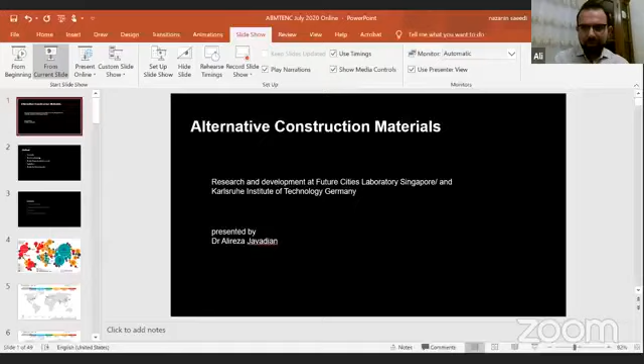Great, again very good afternoon to everyone. My name is Alireza, and I'm doing my research at the Future Cities Lab in Singapore, which was set up by ETH Zurich in 2012 to do research between Zurich and Singapore with the invitation of Singapore National Research Foundation. I'm also working with Karlsruhe Institute of Technology in Germany, which is also my next move to continue my research. A very quick outlook of today's presentation: I'll start with a short introduction, a quick research methodology of my research mainly on bamboo composite materials, some applications we have worked on over the past couple of years, and finally a quick heads up on our future cooperation, hopefully with your very good team back in Brazil.

So the reason we started this research in 2012 was the fact that we were looking into urbanization. And when we started to do a little bit of research on how the world urbanization and urbanized population looks like, we ended up having this map.

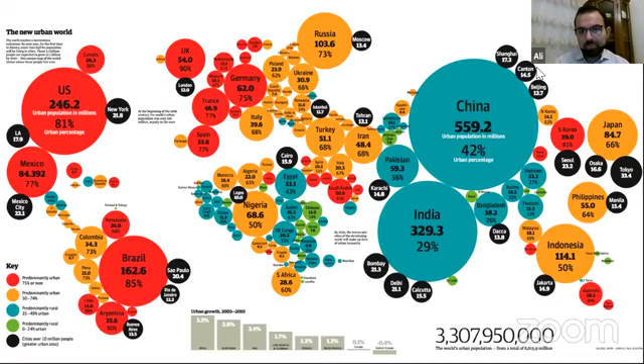As you can see, this map was generated between 2005 and 2010. You can see countries in Asia, Southeast Asia, like Indonesia and the Philippines, where more than 50-60% of the people are living in urbanized areas. If you look into Latin and Central America, where Brazil is located, this counts up to 85%. What does this number mean to us as architects and engineers? It means that we need to look into how we can provide basic infrastructure for the people who are moving into urbanized areas.

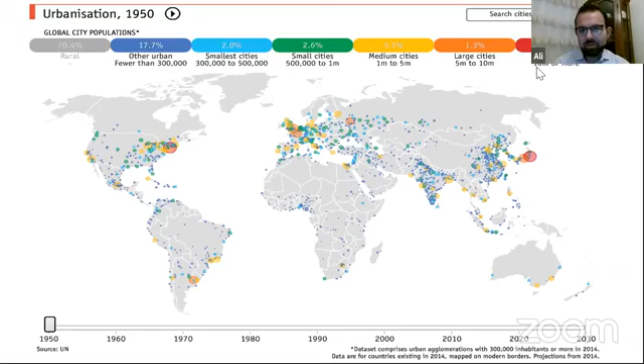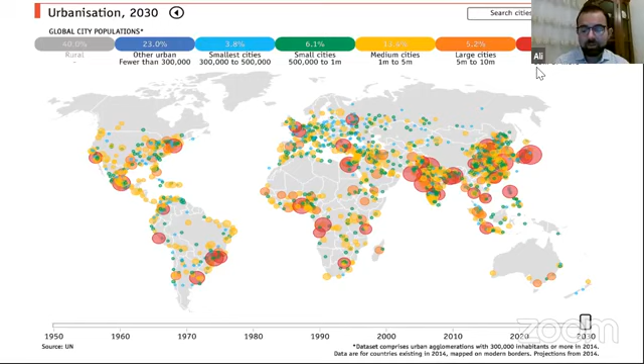In 2030, the estimation is that more than 13% of the people living in medium cities, and that creates a big challenge for government agencies, administrators, industries, and the building and construction industry, because we need to provide these people with housing solutions.

So this was our main challenge. When we started our research, after almost 6 months, we started to find the problem. By 2100, globally, we would need more than 2 billion new housing units.

At the same time, we are working with finite material resources. This demand is more acute in developing countries like in Southeast Asia, like Indonesia, like Malaysia, or in Central Latin America, like Peru, like Ecuador, like Colombia, and in Africa, like Ethiopia, like Kenya.

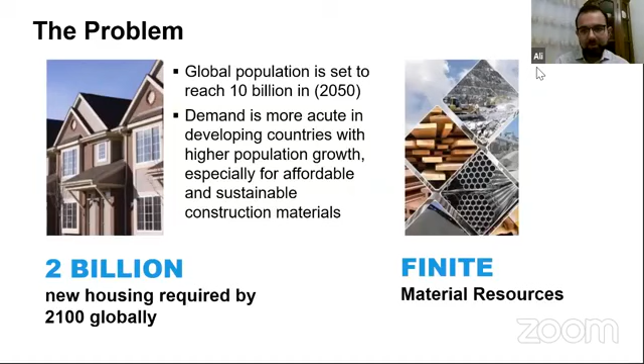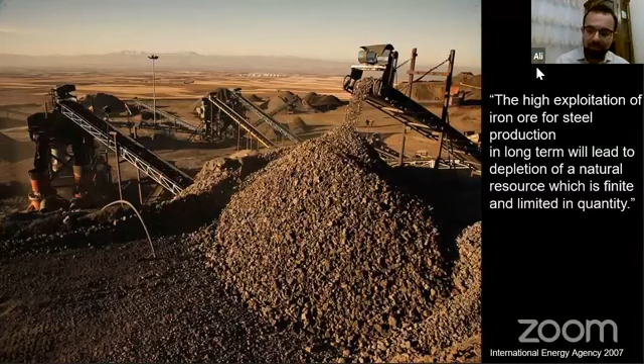If you look at the materials that we as civil engineers, or even as architects, are traditionally using, it's steel. Unfortunately, steel has a big challenge for us because iron ore is not going to be renewed over the next couple of years, but over the millennia. So we have limited resources of iron ore.

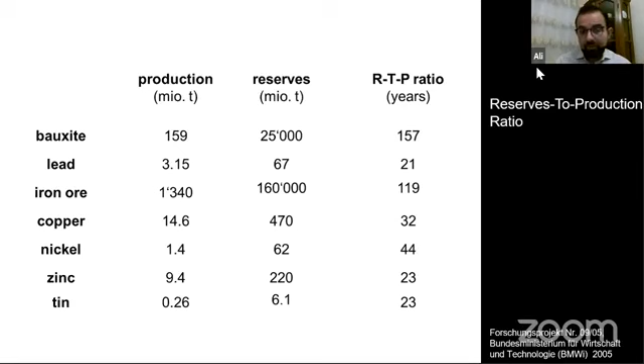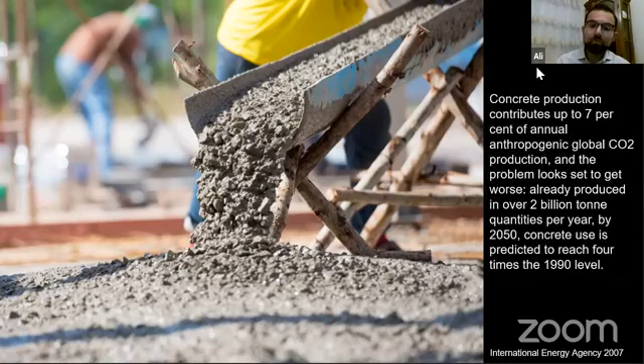Same for concrete. Even though it's a very cheap material, it may not be very sustainable because almost 7% of global CO2 emissions are contributed by the cement industry worldwide. This means that in terms of environmental factors, concrete or even steel might not be the right solutions.

So we started to ask ourselves, what would be an alternative? But before I jump to that, I would like to talk about our hypothesis. Normally I don't show the hypothesis of our research, but here, since I'm talking to experts in the field, this was very challenging for us because we were not sure which direction to go. It took us almost 2 to 3 months to formulate the hypothesis.

So finally, we formulated that it is possible to develop high-performance composite materials from alternative and renewable resources that can be designed to have the necessary properties and be applied in the building and construction industry. Our main focus was to use alternative and renewable resources for the building and construction industry, from technologies already in the market: composite materials.

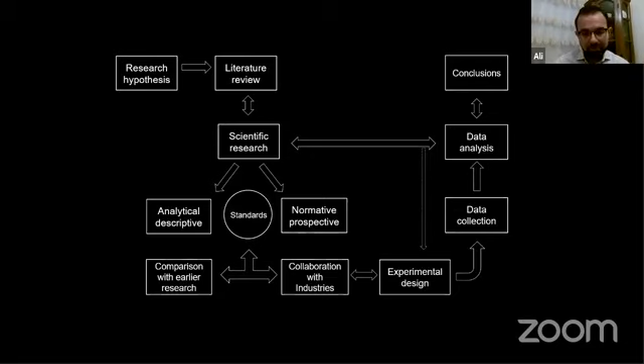So we set up our research lab in Singapore in 2013, after almost 1 year of preliminary research and understanding of what we wanted to do. The grant we received was from the Singapore National Research Foundation, 80%, and 20% from the Swiss National Research Foundation.

We called it the Advanced Fiber Composite Laboratory because we weren't yet sure we were going to use bamboo fiber, so we called it Advanced Fiber. We wanted to ensure it remains very general, so if we change the fibers, we still have the same lab. This was the basic setup of the lab in 2013, which of course now looks very, very different.

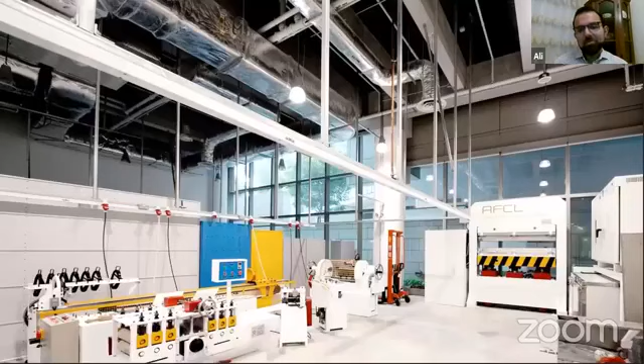We started with machineries that already existed in countries like China and Indonesia for the wood factories, and even for the bamboo industries, because the bamboo industries back in 2012, 2013 were not so interesting for even the Chinese. So we started to modify and design some of these machines ourselves, but we made most of them in China, in the factories we were collaborating with, as well as in Germany. But in terms of pricing, at the end we started to look more into China and Taiwan.

But if you go to Southeast Asia, to Indonesia, to Thailand, you see bamboo plants. I'm sure, as you see in Brazil, along the roads, in normal villages, in small towns, you see a lot of bamboo. But in Singapore, unfortunately, you don't see it. And when we started to talk about bamboo in Singapore, they looked at it as a poor man's timber. This was, of course, very hard for us because we wanted to promote using bamboo.

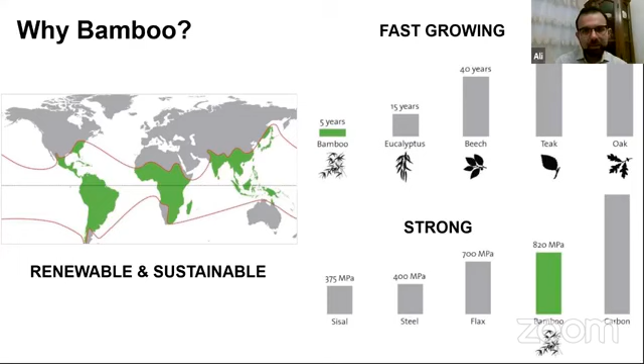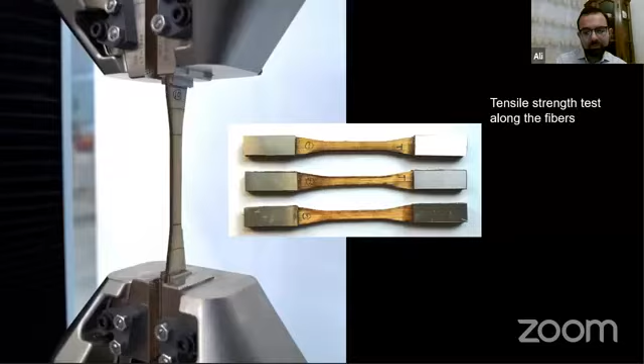So we started to collect bamboo from this region, from Thailand, Indonesia, Malaysia, around 13 countries. We traveled to them, looked at the bamboo plants there, and tested them from different ages. At the end, we tested many mechanical properties in terms of tensile properties, bending capacities, and flexural strengths. But one of our main team challenges was the lack of standardization.

ISO has a very, I would say, outdated standard for testing materials like bamboo. Unfortunately, many of those standards we started to follow caused problems, because when we changed the bamboo species, either the bamboo column was very thin or the bamboo wall thickness was very thin, and we were not able to follow the standards. That made our testing a little bit tedious and time consuming. It took us almost 1.5 years to test most common bamboo species from this region.

What was interesting for us was that the most common bamboo species in Southeast Asia was Dendrocalamus asper, and this is some of the classification we did. We classified these bamboos according to their wall thickness as well as according to the culm diameter. The maximum strength in terms of tension we found was 340 MPa, and the lowest was 193 MPa. There is a wide range of mechanical properties between the bamboos we collected. Even the same species grown in Southeast Asia, but in different regions, had different mechanical properties.

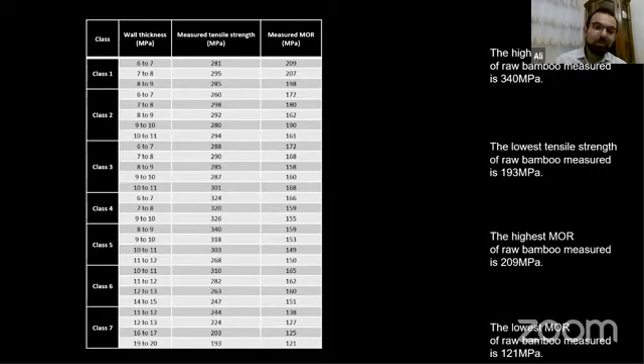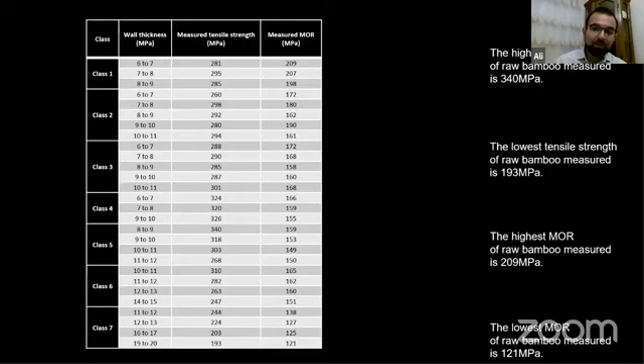This shows another challenge for us where we wanted to promote bamboo, because the industry and even government agencies like the building and construction industry in Singapore see this as one of the main challenges: how we can standardize bamboo for use as a building material. But we did some statistical and mathematical modeling to see how we can estimate the mechanical properties without testing them.

This was very important for us, because when we wanted to order some bamboo, for example, from Indonesia, we didn't have to travel all the way, or necessarily ask them to send us a few samples. So based on more than 5,000 samples, we developed basic formulations to estimate mechanical properties like elastic modulus, modulus of rupture, compressive strength, and tensile strength. We had a good estimate before we received the bamboo, so we could tell farmers not to cut a certain bamboo, and instead cut it to the specification we wanted.

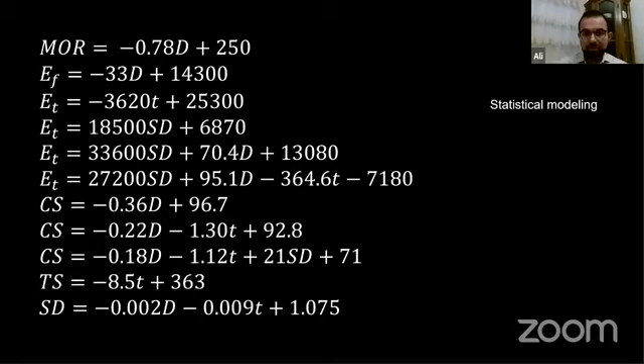The next step was how we wanted to industrialize bamboo. As you know, bamboo in its raw, natural form has been used for many centuries around the globe, which was very interesting for us. Much of our knowledge came from papers Professor Ghavami wrote about the use of bamboo in Brazil and other countries he worked in over the years. But we wanted to see how we could promote bamboo as a fiber in high-tech technology.

So we started looking into composite fabrication, basically fiber reinforced polymers, but using bamboo fibers. Our main challenge was that if we used any adhesive system, we had the challenge of sustainability, since we wanted to promote bamboo as a sustainable material. At the same time, if we used a non-sustainable synthetic adhesive system, we had the challenge of convincing the industry to call our product green. So we had 3 criteria to choose our resin system: VOC free, acceptable mechanical properties, and bio-based content.

So we worked with 2 polymer companies, some of you may have heard of them: Rehau from Germany, and Wacker, also from Germany. It took them almost 2 years, a very progressive process, to reach a stage where we had a resin system comparable to something like Araldite, with the mechanical properties we wanted and high bio-based content that made recycling possible.

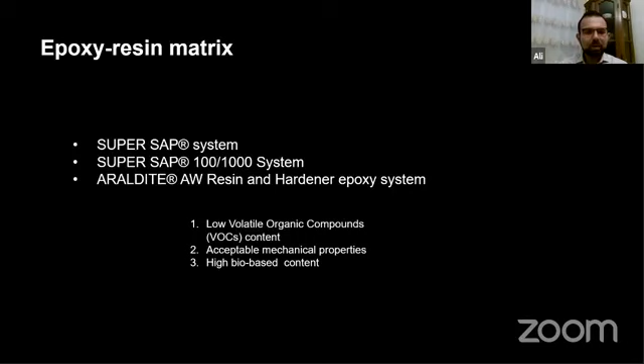The next step was to process the bamboo into strands. We used machinery that was already being used in many countries around the globe, but we made modifications so we could get these strands into the right shape, the right thickness, and with the right fiber diameters.

The next step was how to get the bamboo fiber to interact with the resin matrix. Finally, we used a hot press compression molding system to compress all these impregnated layers together. The combination of hot press temperature, pressure, and time was very important. These 3 stages took us almost 2.5 years to reach the final product with the properties we wanted.

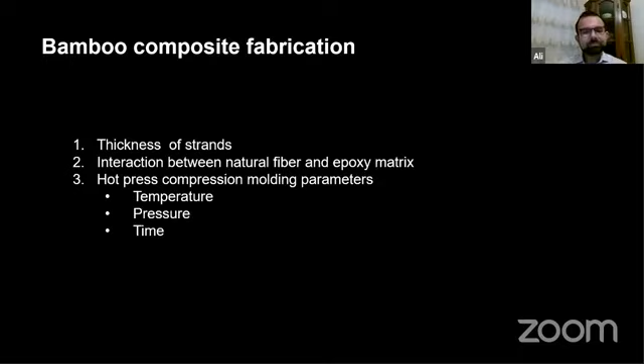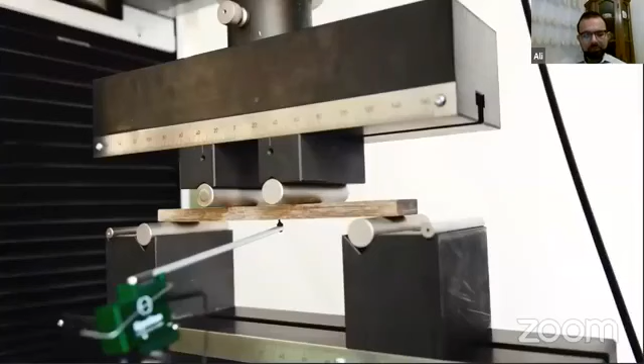Again, we regularly had to do testing of mechanical properties like tensile strength and elastic modulus, both along the fibers and across the fibers, as well as bending along and across the fibers. From late 2013, when the lab was fully set up, until late 2017, when we were confident this was the product we wanted, we tested more than 10,000 samples for bending and more than 8,000 for tensile, using a variety of bamboo species we had in Indonesia.

So I'd like to pause a little bit here, because there are many numbers to digest.

These are the properties we achieved at the end of 2017, based on the tests I mentioned earlier. As you can see, in terms of tensile strength, we had a range of between 200 to 300 MPa, that's Newtons per square millimeter. When you compare it with glulam, this is the glulam widely available in Singapore.

They've recently used it for non-structural walls in Singapore, but it's also imported mostly from New Zealand, Australia, and Germany. In terms of bending strength, flexural strength, it has high bending capacity—almost 10 times that of glulam.

In terms of compressive strength, the range is wider, again depending on the fiber, the density of the natural bamboo material, and where we collect or harvest the bamboo.

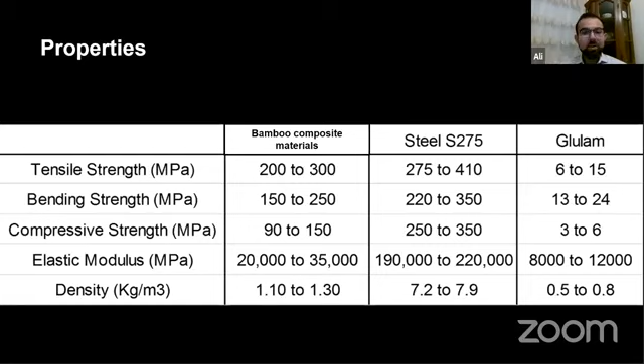But this is very important, because normally we should compare the strength to weight ratio. When you compare the tensile strength to density—the ratio—between the bamboo composite and glulam, the bamboo composite stands much, much higher.

I'd like to move on to the next step, which is the applications. The very first application, and the title of my PhD thesis back at ETH Zurich, was how we can replace steel in concrete with our material.

I'm very happy that Professor Ghavami is here tonight, because most of my work and the literature review I did, I learned from him. His work over the past 20-30 years was very promising and gave me the momentum to believe it's possible—if natural materials can be used in concrete, then why not a bamboo composite?

So we did a lot of pull-out tests to see the bonding mechanism between concrete and bamboo composite materials, because normally steel has very good bonding between the two materials, but we wanted to ensure this material also has good bonding.

What we did was apply some type of coatings that we got from two chemical companies I mentioned earlier, because chemistry was not my capacity or expertise. So I had to get that knowledge and expertise from Wacker and Rehau.

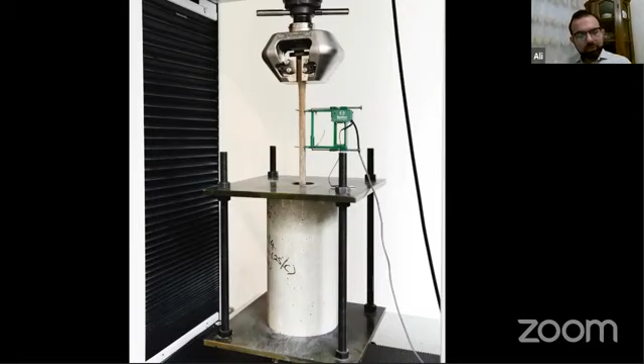This was the bamboo composite reinforcement system that we developed in Singapore. Even the stirrups, the shear reinforcement, were made from the bamboo composite materials we developed—the longitudinal reinforcement, the whole system.

The idea, early on, was that we could have a prefab system—basically this whole element that you see for reinforcing.

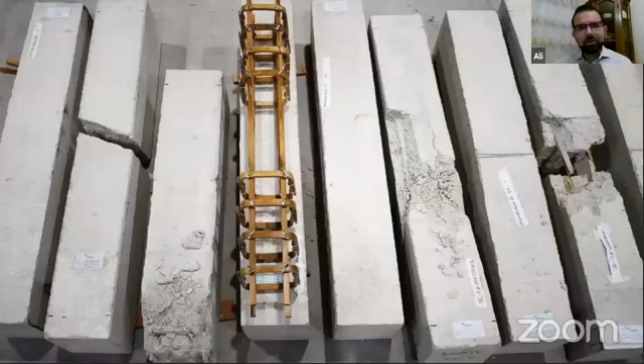Some of the testing we did followed ACI FRP standards for designing the beams. We wanted to see where shear failure happens, where tensile failure happens, and where compressive failure happens in concrete—but most importantly, we wanted to have the tensile failure occur in our bamboo composite reinforcement.

The results were quite promising. We published a paper on it, and even my thesis, available at the ETH library, explains all these calculations in much detail. The next application I worked on after defending my PhD thesis was how to reduce the cross section of glulam beams.

Because glulam, when used for buildings higher than one story, requires more layers, resulting in heavier elements and more material. So we wanted to promote sustainability and a higher strength-to-weight ratio.

So what we did was say: if you don't want to use the whole section out of glulam, you could use part of it out of glulam and then reinforce it with our materials.

Again, the results were quite promising—we achieved a 20 to 25% increase in mechanical capacity, especially in elastic modulus in terms of deflection. This was the idea on how we can promote our bamboo composite materials, especially in countries like Singapore that are a bit reluctant to use anything related to bamboo.

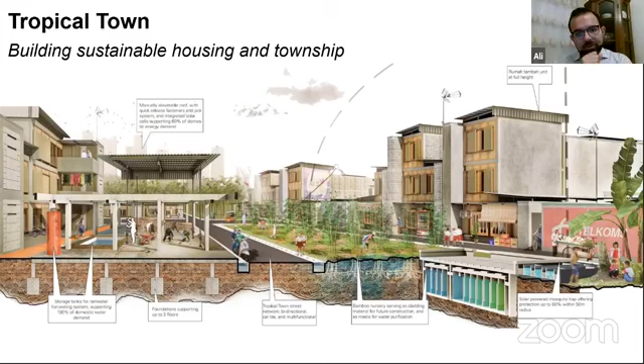So we started to look at how we could use our materials to build housing. You can see the models of the house here. One of the criteria they gave us was that they didn't want to see the whole thing made out of bamboo composite, because they saw this as a cultural shock.

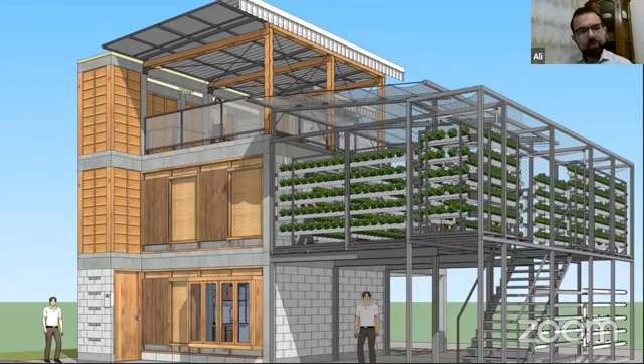So they wanted a combination of traditional materials like concrete and our materials. We accepted this because it was a very good opportunity to showcase that it's possible to use our material in a natural environment. It's quite strong, quite resistant to fungi and insects, and unlike natural bamboo, you don't have a lot of problems with insects or UV, or need to protect it. Therefore, we accepted that offer and built that house in Batam, Indonesia.

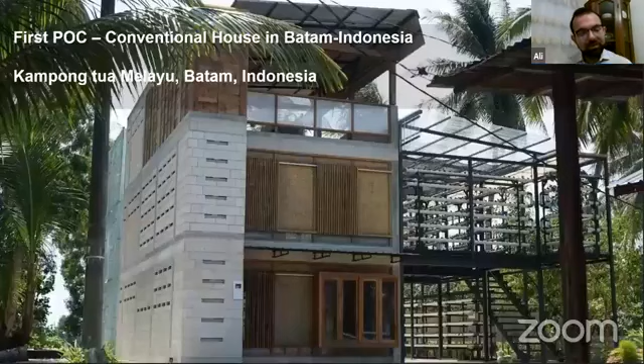In July last year, we officially launched the house. It was our very first proof of concept, and it was warmly received by the Indonesian ministries as well as our Swiss ambassador in Indonesia. It was, I would say, a small milestone for us after almost 7 years of research.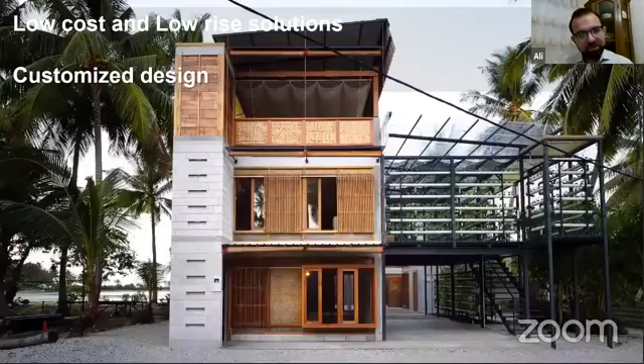On the first floor, we used our material as door frames, window frames, and shading frames. On the second floor, moving to the interior, we used our materials as a cladding system. On the third and final floor, we used the columns and beams again. So as you can see, gradually we moved to replace the conventional materials with our materials.

Instead of telling them we can use the whole material for the whole house right away, we said we could do it gradually, to showcase that it's possible to use our materials. On the second story, we had Hebel blocks, but on the third story, we replaced the Hebel blocks with only 10mm, or maybe 15mm, bamboo composite boards, along with the columns you can see around the boards.

So I would like to move on to the next step, and I would like to see what the panelists would like to discuss.

Late last year, we registered a spin-off called Widuz with the idea that we could commercialize our research and bring it to applications. ETH Zurich supported us at the earliest stage, giving us access to investors, venture capitalists, and industrial partners, to raise a bit of funding for promoting our startup. Currently, we are at the stage of raising funds to set up our very first factory in Cambodia, near Singapore.

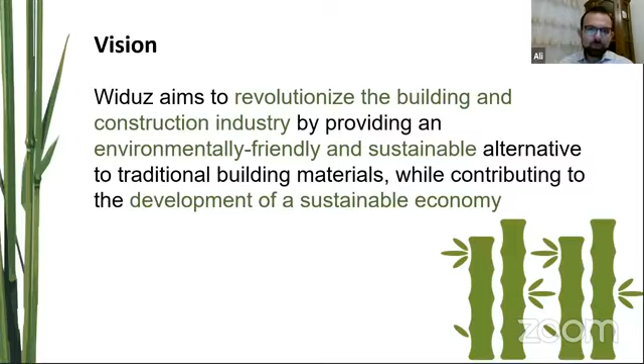Widuz currently collaborates with the Singapore ETH Centre, the branch of ETH Zurich in Singapore, and with Karlsruhe Institute of Technology back in Germany. Together we are trying to scale up the process we developed in Singapore and commercialize it. We also have industrial partners in the stage of discussion and negotiation that I cannot name here.

A very important part is how we can address the Sustainable Development Goals. Based on our research, we see that we can address at least 6 of these SDGs.

No poverty: when we create our factory in Cambodia, we can create new bamboo plantations, create new jobs, and employ locals who don't have jobs. This is very important for low-income countries like Cambodia and Vietnam, which need new ideas for job creation.

Clean energy: not the whole bamboo can be used for this process. Some of it could be used as biomass for producing electricity, especially in these countries that don't have access to electricity all over the country.

In terms of sustainable cities, bamboo can be used for affordable housing solutions.

Goal number 12: we can use a green, sustainable alternative like bamboo composite to replace steel, concrete, and glass, at least in regions with access to bamboo. And bamboo itself, as you might be aware, is a natural carbon sink—it absorbs a lot of CO2, even compared to timber.

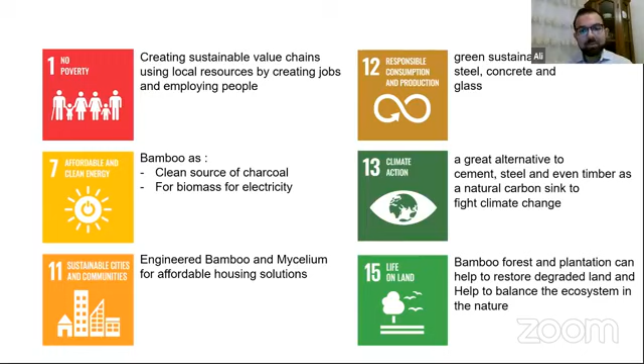Finally, if we can have more bamboo forests and plantations, we can restore a lot of degraded land. This is a challenge in Indonesia, because they grow a lot of palm trees to get oil, but after a few years the land becomes degraded and they can't grow more palm trees. They have to restore the land, and bamboo is one of the great alternatives for that.

The next step for my research, both at our startup and at the university, is to develop an adhesive system that moves us towards biocompatibility. So far we've had bio-based adhesives, but we want to move to a biocompatible adhesive system, which would give us the opportunity to fully recycle our materials.

The next research idea is to improve resistance against UV in harsh environments. We tested this in the region and it works very well, but we'd like to see how it reacts in temperate environments like Europe or Northern America, where the conditions are harsher.

The third idea is to develop a microstructure for sound and heat insulation. At the moment, sound insulation is not that great. Heat insulation is not bad, but both properties have to be improved if we want to commercialize it.

Finally, large-scale testing and testing of full-size elements is very important—this is something we have to continue, because to upscale and commercialize, we need certificates. To get certificates, we need to ensure that full-size elements have the lowest possible standard deviations, and that properties remain consistent across elements. This is one of the most important research directions we have to continue over the next year or so.

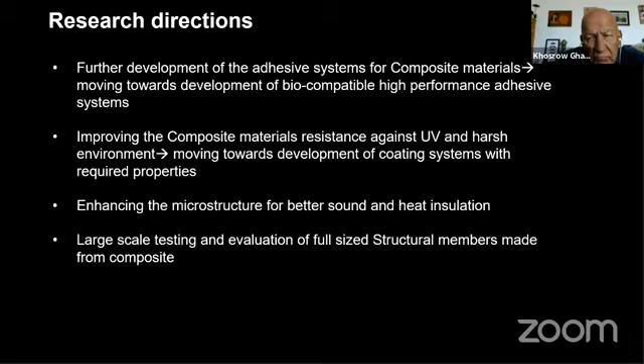NaOH, what they call sodium hydroxide solution. So the idea was to get the lignin out as much as possible, increase the fiber density, and also make sure that insects or fungi could not grow. This helped us a lot, because after we tested them in the environment chamber, the weathering chamber, we had good results. So the treatment was very simple: boil the bamboo strands together with the NaOH solution, I think 1 to 3% solution.

Yeah, but you say okay, that's the bamboo treatment. But if you use your bamboo strip in concrete, you would not have bonding with the normal bamboo. I know your question, very good. Sorry, I thought you were talking about the composite fabrication. No, because the way you've shown it, the bamboo surface is not treated.

Sure, yes, it was treated with a formulation that was provided by the company Rehau to us. It was a type of, I would say, epoxy coating applied on the surface, and that helped us to improve the bonding mechanism.

So we tested many types of coatings. We tested water-based coating, we even tested sand particle coating. But the coating formulated by the company Rehau gave us the highest bonding mechanism between the bamboo composite and the concrete. So that was basically the best formulation achieved by the company and provided to the university for us to use.